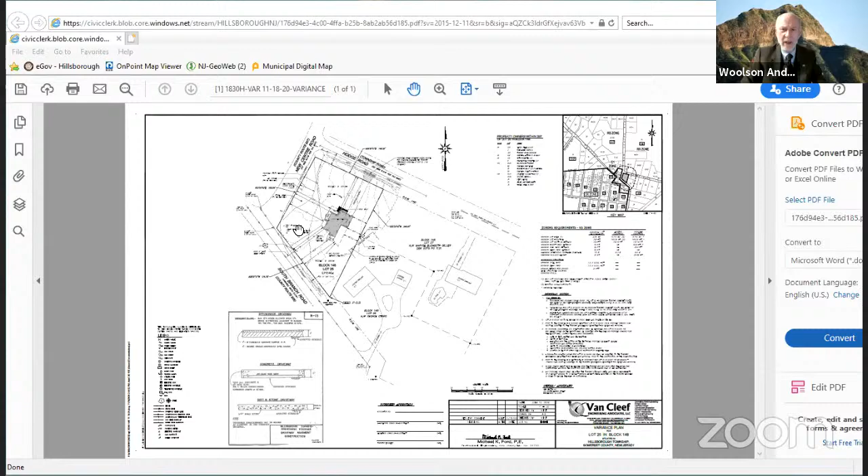Because I didn't realize that the gravel already constituted 8%. The other thing I would note is that the request for the house and the impervious is 9.9. Now, this is a house - the applicant is not going to live there, is that correct, Mike? I don't know if the applicant's going to live there or not.

Well, the applicant is the LLC. I mean, it sounds like... I doubt it, but I don't have direct knowledge of that. So it sounds like it might be a spec house, which means somebody might buy this house thinking they'll put in a bigger patio or this or that, and they're already at maximum impervious. Yeah, that was a concern I had too - that you're already up to the limit, and if they want to even put in a shed or a doghouse, they may have to come back. And if they wanted to put a pool in, like the last applicant, where would they put the pool?

Beyond the impervious coverage, the 3 road frontages present an obstacle for a pool. The pool itself, an above ground pool, wouldn't be considered impervious coverage, but the 3 road frontages would preclude the accessory structure in the front yard.

Mike, we have had many requests for increase in impervious, and my concern is this house as built would already be at maximum.

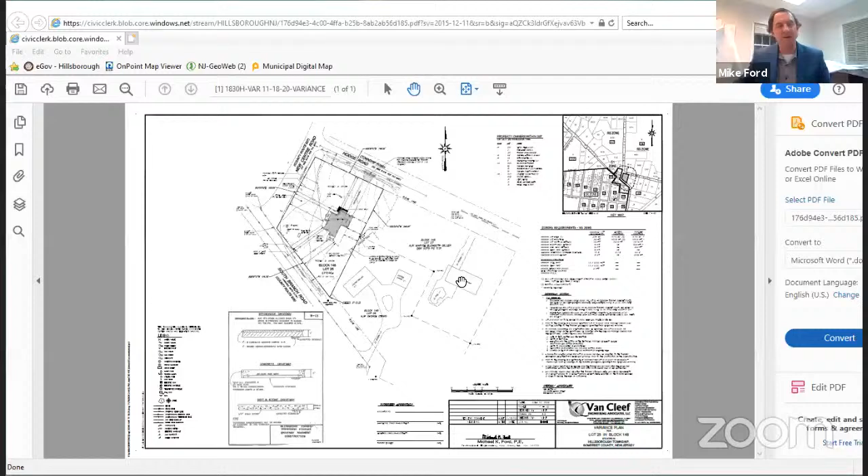That's because the garage is only 1 floor. The 2-story portion is only this portion right here. I look at the footprint of the house on lot 26, and even the footprint of the house on the other lot nearby, and see them as comparable. Well, what's the square footage of the house then?

Take away the garage space. You're talking about the footprint, right, about 2,200 square feet is the livable. Now, Mike, it's a 4-bedroom dwelling. 3 of those bedrooms are on the 2nd floor. 1 of the bedrooms is on the 1st floor.

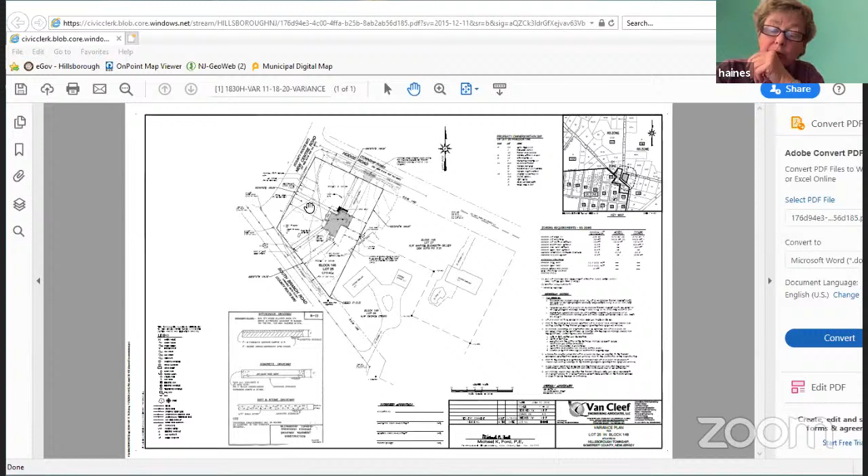I mean, it looks big, but it's the footprint we're talking about. Okay, one thing, go ahead. No, I was just- let me know when you're done. Oh, I'm done. I'm just questioning now, back to the garage that John had asked about earlier. I'm gonna ask that now. Okay, go ahead.

Thank you. Hey, Mike, the garage, it's 25 feet wide. That's a 2-car garage, right? Now, I'm just trying to improve the impervious surface here because, as we mentioned, we're concerned about somebody buying and moving in, they're gonna have to come before the board to put even a sidewalk in. So I'm looking at that driveway. It's 25 feet, that garage, and it's listed as 1,000 square feet on the sheet, and I beg to differ because that driveway is 75 feet long and it's as wide as the garage, which is 25 feet.

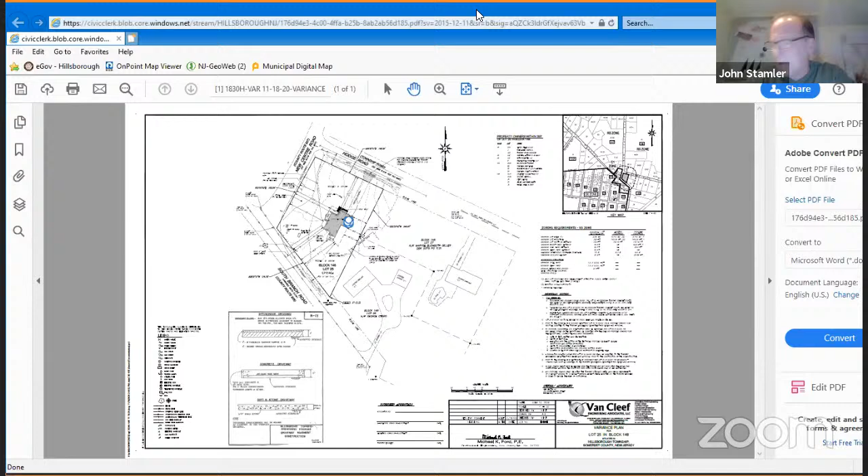To me, Mr. Stamler, Bob Euro- hey Bob, the actual width of the garage is 14. It's 25 feet deep. Oh, right, let me move in and- I can't save you. I'm sorry, this is only the driveway, and the width of the garage is 14. The 25 is the depth. So it is a one-car garage.

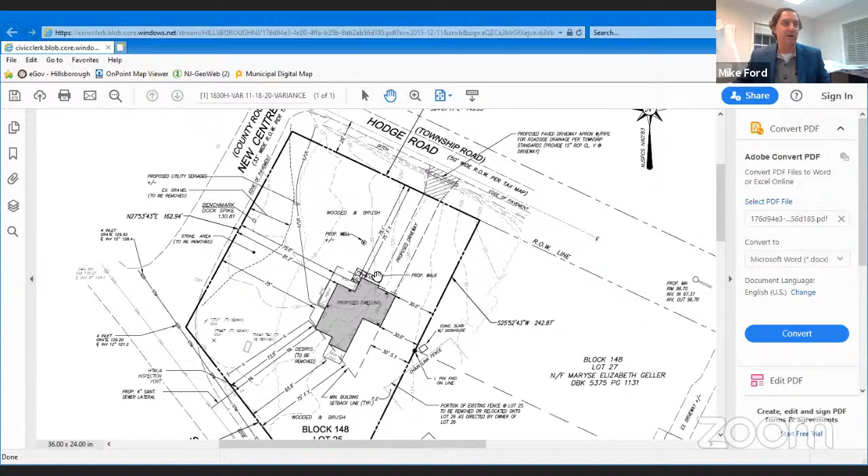Okay, and perhaps I'll jump into the concern. One possibility would be, and you just mentioned it, the 75-foot long driveway. If we were to slide the house slightly closer to Hodge Road, maybe it is about the same as our neighbor now, but that would eliminate the front yard setback on South Branch, but we don't need such a long driveway, and that would reduce the impervious coverage.

Give us some numbers, Mike. I was hoping to save you on that. About the size of a shed or a big dog house. If it's a 15-foot wide driveway, every 10 feet gives us another approximately 150 square feet. If we went to 65 feet or 60 feet.

Do we have to renotice if you did that? I don't think so. This is one of those unique situations where there is discussion with the board about rearranging things. This is one of the few instances that I think the typical kind of catch-all language about other things that may occur during discussion with the board is probably effective. There are variances already, and if the board wants to suggest a rearrangement, I think the notice is still sufficient.

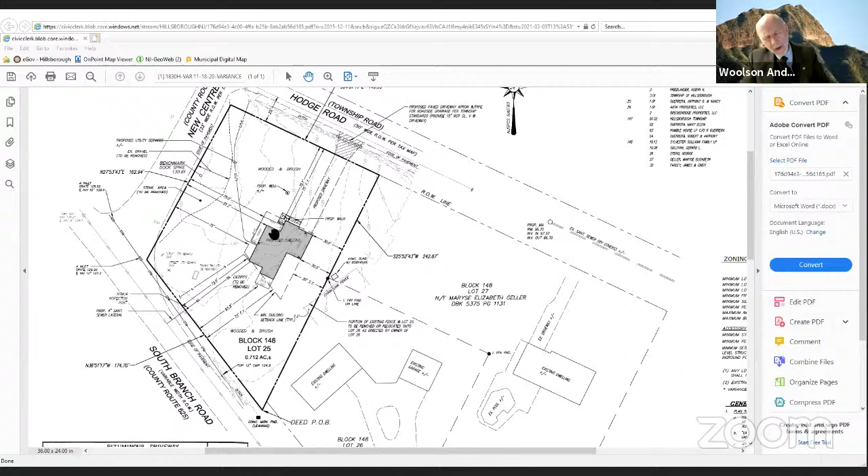So, well, the requirement on setback from New Center is 75 feet, correct? Right, and that's where we're at now to that attached wraparound porch. Okay, I did not see that, I was looking at another memo. Apparently there was information given that it was more than that. Yeah, okay, thank you, so there's 75 to the porch.

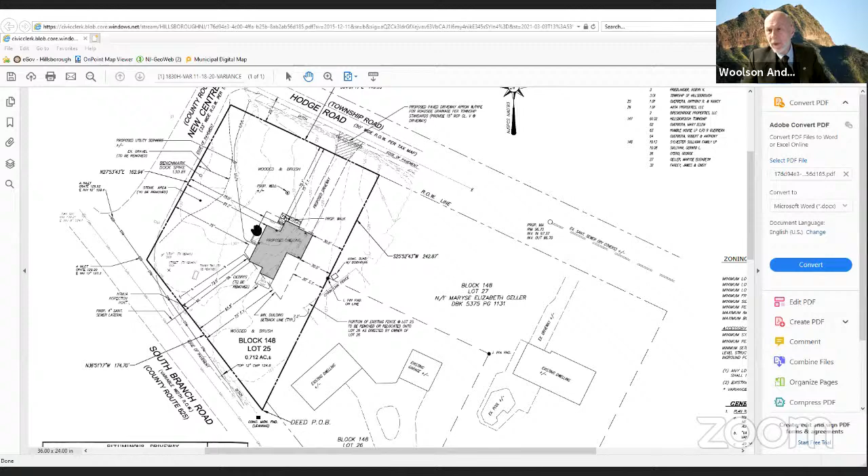They'll have a perfect view of the gas station, right, and the post office?

Mr. Chairman, Bob Euro, one more time. Mr. Ford, just for the record, I think you misspoke a little earlier. Can you confirm, per the plan that's been submitted, what the setback is off of South Branch Road to the corner of the dwelling? The corner of the dwelling right here, I highlight on the plan, is 73.5. Okay, I believe you had mentioned it was 53.5 in your testimony. I just wanted clarification.

73.5, so it's only slightly under, but we are technically required to have this setback to the deck, because the deck is attached to the dwelling, and that's at 65.8 feet. So that's the relief we asked for.

I just wanted to clarify for the record, and then clean up all the other items while we're waiting for the answer to the phase 1 request. As I indicated earlier, we have about a half acre of woods today. The non-wooded area is basically along New Center Road in that existing gravel area, which will be revegetated, but we have no alternative in order to build within the acceptable building envelope but to disturb the wooded area. We're disturbing about 0.29 acres of that 0.51 acres of woods, which is about 57% of the wooded area on site, and technically requires relief because your ordinance has a ceiling of 20% of existing woods.

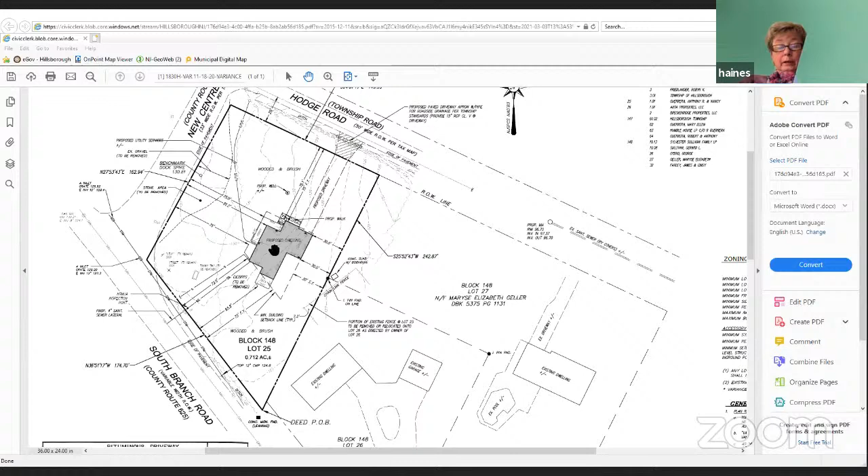So, plus, if requested by the county, the widening of the right-of-way on South Branch Road, along with the phase 1. Just to be clear, that the street trees and tree mitigation are two separate requirements, not simultaneous.

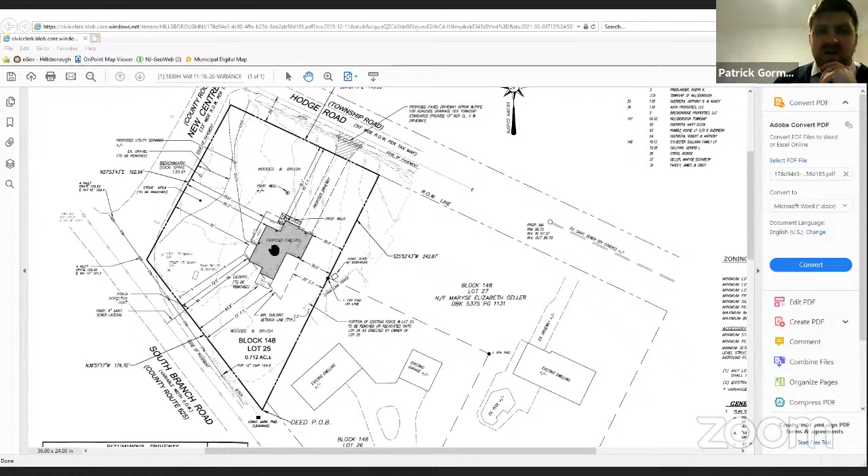But I've been to this site before. There are some very scrubby trees, some questionable bushes and shrubs that have been overgrown at the same time. It's hard to make that distinction. If you want to go out there and tag every tree, feel free to do so, but it'll be a cleanup for this property.

We agree that this proposal is consistent with the permitted principal uses in the zone, and but for the nonconformities of the existing conditions and the minor front yard setback, will be an enhancement to the community, not a detriment. It will help with the visual environment of the surrounding area, and help to provide for a suitable use of this currently vacant property.

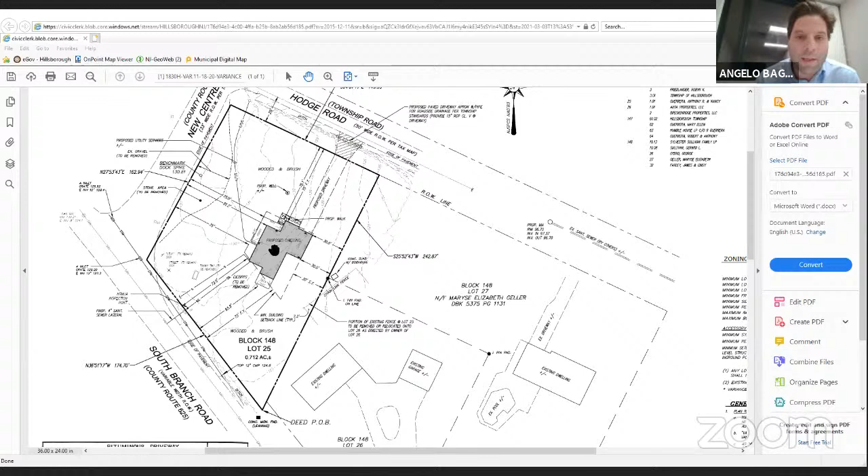Thank you, Mr. Ford. Just to update, I have spoken to the applicant, and they are willing to do the phase 1 if required. Oh, great, fantastic. Okay, any more questions for this witness, for Mike, from the board members?